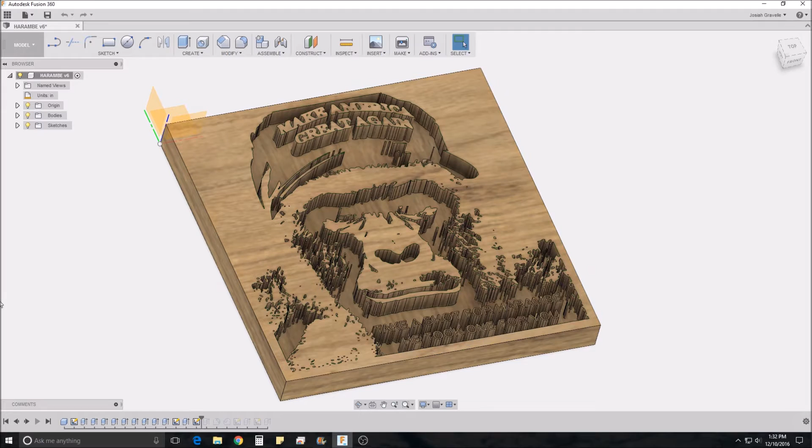So I'm not going to show you the whole deal, I'll just do a run through of the image being created. All I did was bring in an SVG file and make a 9.5 by 9.5 inch board, went through and found all the little pieces, extruded them down, and added the lettering.

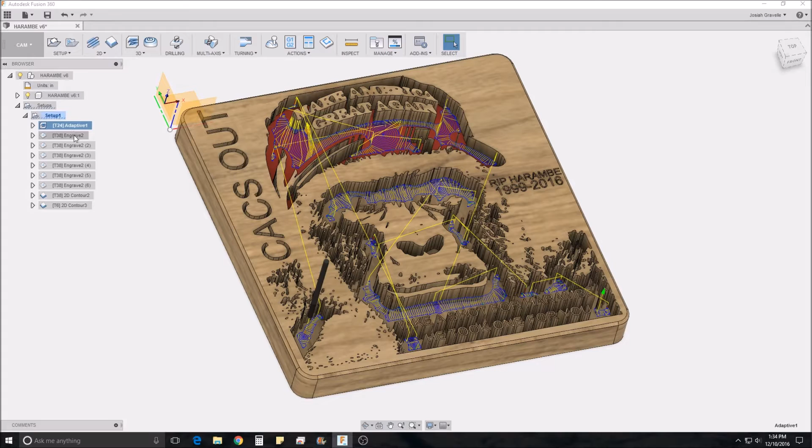And then for the cam portion, I wanted to go in for the big flat areas, and I'll show that here in a second. Go into the big flat areas and just mill those out first, and then this is kind of all the detailed pieces.

It's just going to go in with a 45-degree bit and just carve all that out. And then the last step is cutting out the board itself.

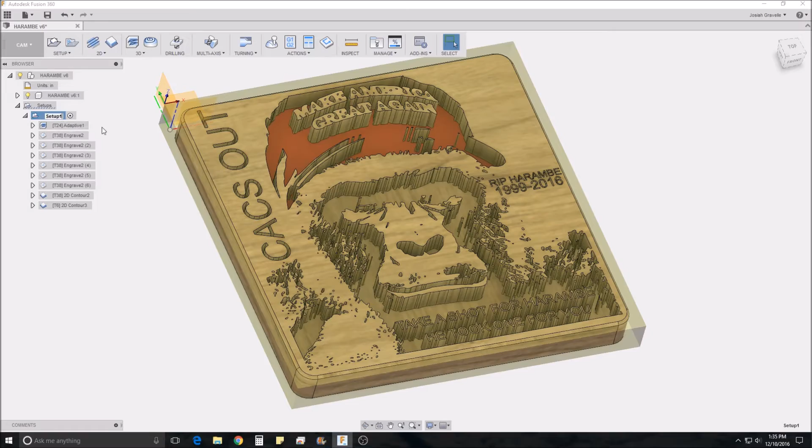So we'll post that. Actually, let me just do a simulation.

For the simulation, I normally pick the wall paint just because I think it shows up a little bit better.

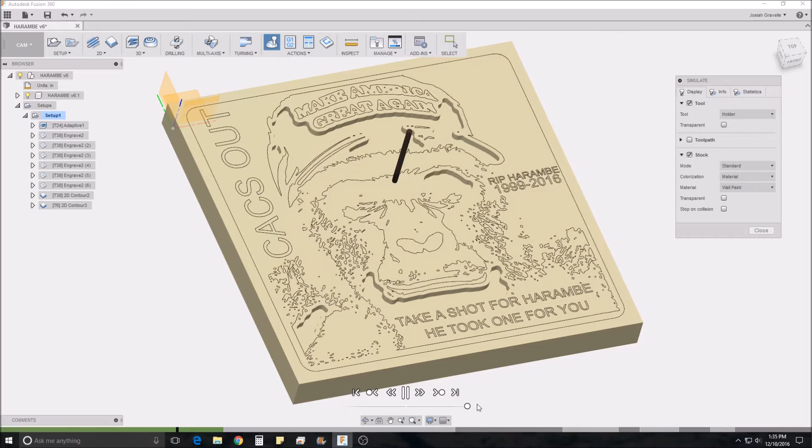Let's speed that up. It goes in, does the flat areas, and then the V-bit comes in and does all the detail work. One thing you can do is turn off the actual plaques, that way you're only looking at the simulated cut, and you can make sure there are no large errors. Sometimes it can be hard to see if you're looking at the simulated cut and the board itself.

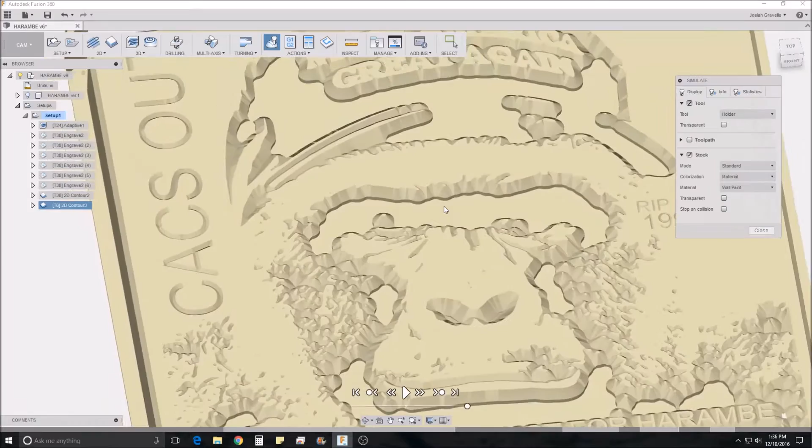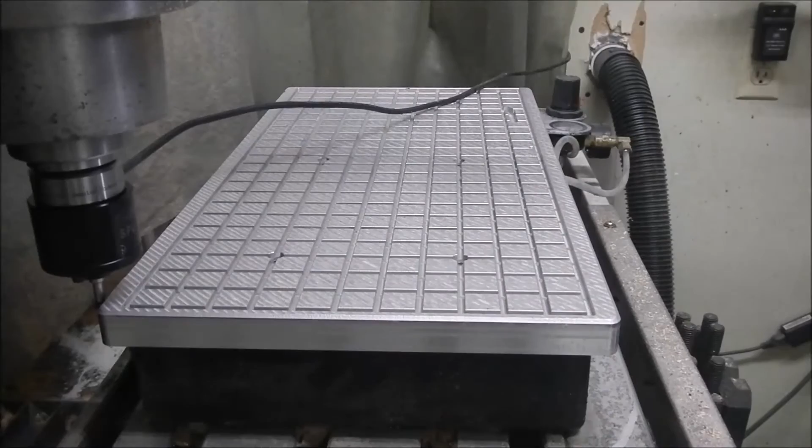And we'll zero the corner there. It doesn't have to be exact because I'm using a pretty well oversized piece of wood. Touch off to the surface there.

When I made this, my main method was I would have the vacuum pallet down on the table, but then I would use sticky tape to stick to the top of the vacuum pallet.

Since making this video, I found that for making plaques, it's easier to just put masking tape on the bottom of the piece of wood, put some O-ring on that vacuum table, and suck it down that way. It works pretty good.

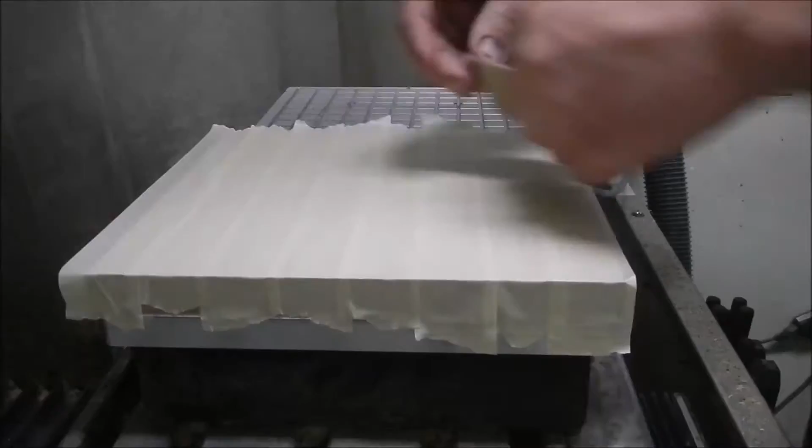I put masking tape over the top just to cover the areas. That way when I paint into the surface, it doesn't mess it up any.

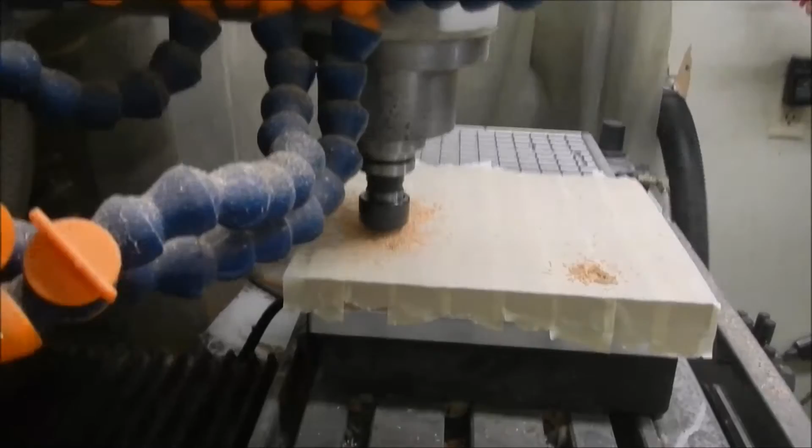And then just like the simulation, you start with the flats. For this, I'm just using a 2-flute 1/8 inch end mill.

And then you can see here that the V-bit is just going in and carving out everything. Like I said, the tape on the surface will make it a little bit easier, so I can paint the bottoms of the areas without getting a lot of paint on the large flat areas.

Obviously, the lettering and all the smaller areas will have to be touched up by hand.

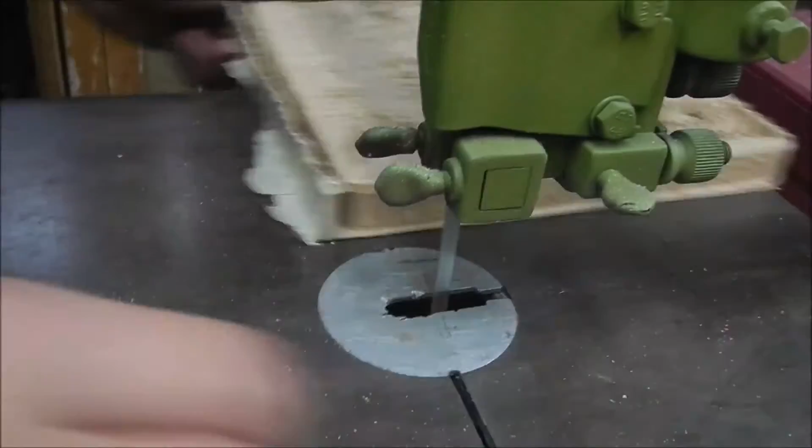And cut out the profile. I left about 50 thousandths on the floor, so that way around the edge there's that little lip, and that's kind of just the leftovers because I don't want to go into my vacuum table.

So you just hit it on a V-bit on a router. Gives a nice clean edge. Do a little bit of hand touch-up.

Then I gotta figure out how I'm going to paint the thing real quick, and obviously cover up the sides. Don't want to get paint all over the whole thing.

On here, I just want to get the large burrs so it doesn't leave kind of a shadow where the spray would go, just to make all the fine-tuning of this thing a little bit easier.

And then also, because the Tormach does have kind of slow RPMs, it tends to leave a bit of a burr at the bottom of the V, so I go in here with some kind of pointed tool. Sometimes I use a nail, or in this case a scribe, and just kind of knock those little burrs out.